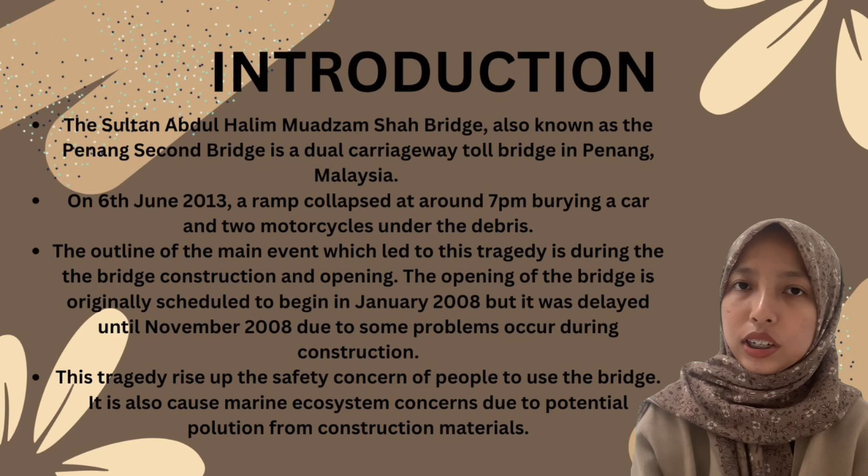Next, let's look at the types of corrosion that we can relate to our case study. The first one is uniform corrosion. Uniform corrosion happens when the material is continuously exposed to a corrosive environment and then takes place uniformly across the surface. It is significant in this case because long-term exposure to the marine environment can lead to uniform corrosion on the bridge structure, and it might contribute to overall material degradation.

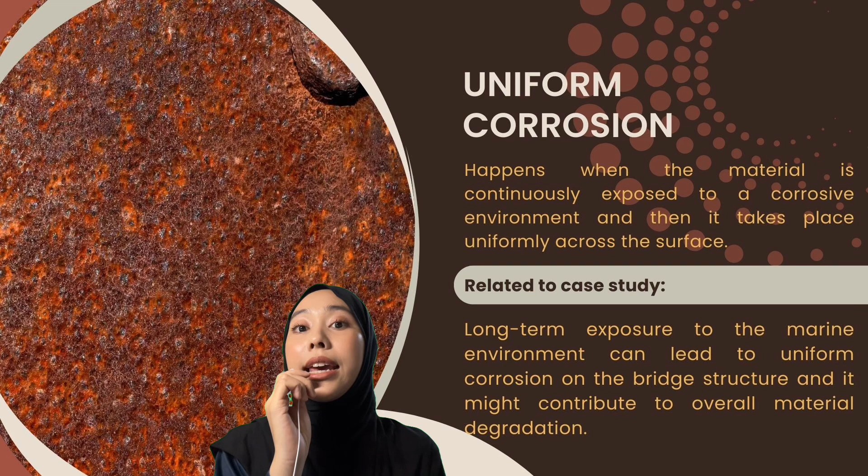The next one is pitting corrosion. Pitting corrosion is a type of corrosion that occurs locally and leaves the metal with tiny holes or pits. It begins when a protective layer is broken, allowing chloride ions in the salt water to concentrate in places and start a localized attack. Since the bridge is in a maritime setting, chloride ions have the potential to erode the steel cable's protective coatings. When stress concentrates, pits will start to crack and spread under tension. Over time, structural components are severely weakened by this kind of corrosion.

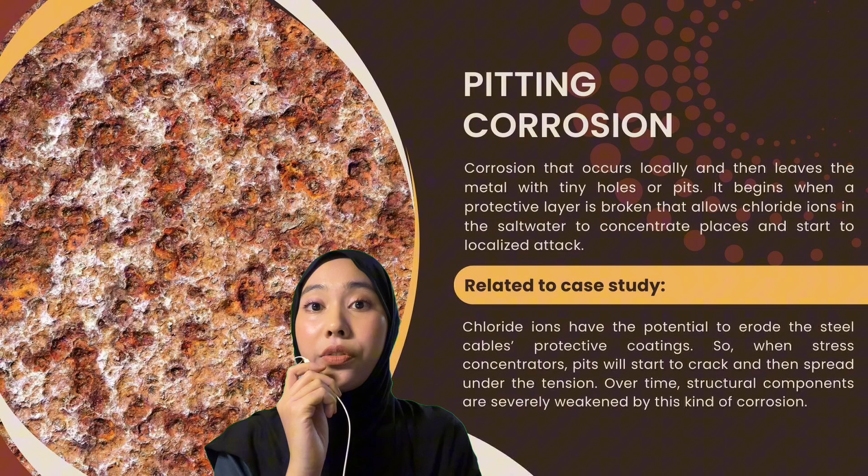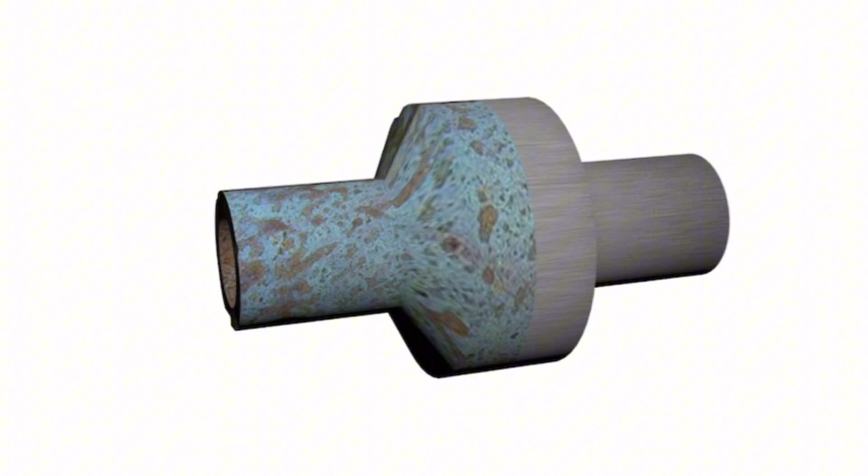The next one is galvanic corrosion. Galvanic corrosion happens when two different metals are electrically coupled in conductive environments. While the cathodic metal is shielded, the more anodic metal will corrode quickly. Galvanic corrosion can happen in this case if the cable joins two other metals with dissimilar electrochemical potential without adequate separation. So it is unlikely to be the main reason unless the bridge design included an unsuitable material pairing.

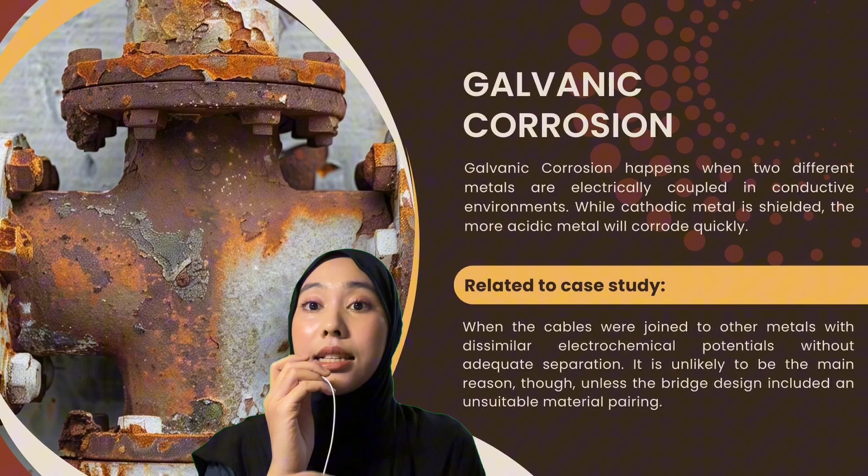After that, crevice corrosion can happen in small spaces or cracks where oxygen is limited and an acidic environment is produced. It usually happens in places where water is standing still or on bolted joints. Corrosion may worsen in this case if water and chloride ions are trapped in cracks in cable assemblies, clamps, or junctions, and this could lead to stress failures by weakening the anchorages or cable terminations.

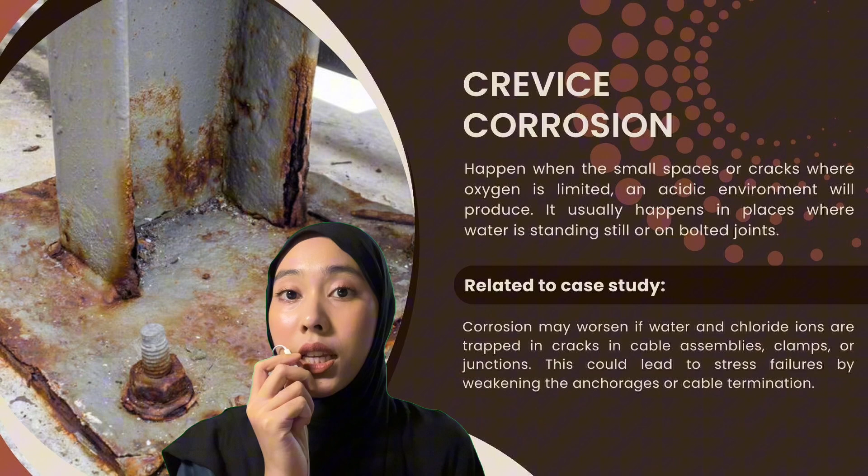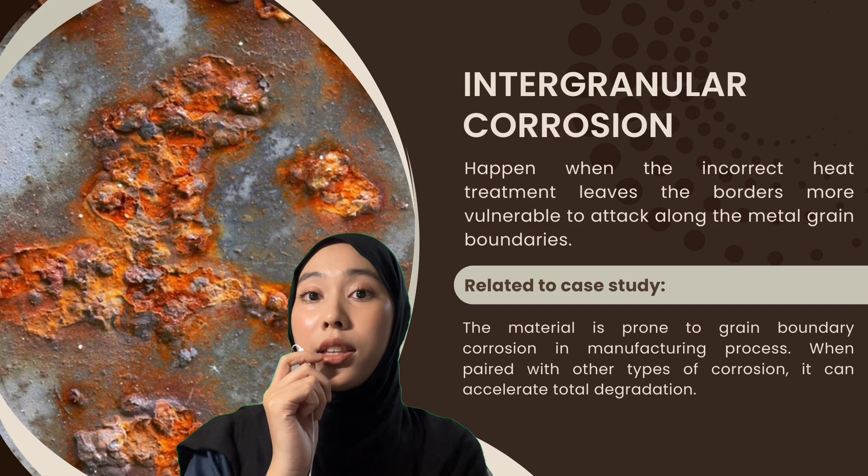The last one is intergranular corrosion. Intergranular corrosion happens when incorrect heat treatment leaves the borders more vulnerable to attack along the metal grain boundaries. It is related to this study if the material is prone to grain boundary corrosion in the manufacturing process. When paired with other types of corrosion, it can accelerate total degradation.

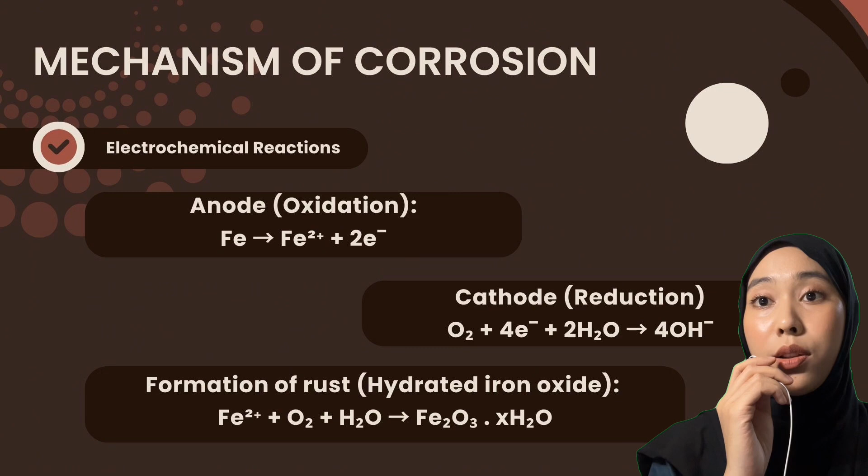We move to the mechanism of corrosion, which is an electrochemical reaction. At the anode, oxidation happens when the iron in the steel oxidizes and forms ferrous ions, while at the cathode, reduction happens when oxygen dissolved in water is reduced to hydroxide ions. This is how the formation of rust happens, where the ferrous ions react with hydroxide ions and oxygen to form rust. In this case, the cables made from steel are exposed to such electrochemical reactions in the seawater, and the chloride ions from the seawater accelerate the anodic reaction, which speeds up the corrosion process.

Let's move forward to environmental factors. The first one we have here is humidity and salt exposure. Since the bridge is in a high humidity coastal area, it encourages condensation on the metal surface.

The chloride ions that act as a catalyst will dissolve the protective coatings and enhance the conductivity to speed up the electrochemical corrosion process. We move to the next one, which is temperature variations.

Temperature fluctuation can lead to thermal stress that worsens coating deterioration and cracks, so it's possible for corrosive substances to enter the steel.

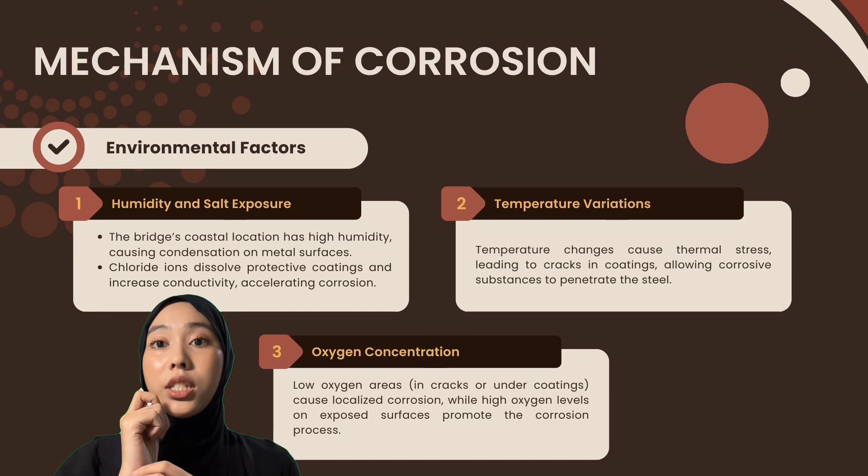And the last one is oxygen concentration. When the low oxygen regions found in cracks or under the coatings produce differential aeration, it causes localized corrosion and high oxygen availability on exposed surfaces, encouraging the cathodic process.

Let's move to the next point, which is material properties. There are two components: steel cable and protective coatings. The material used for the steel cable is high strength steel, with high tensile strength, so it is prone to stress corrosion cracking, pitting corrosion, and brittleness under stress.

Another component is protective coatings. The materials used are galvanization, grease layer, and HDPE sheath. The properties for galvanization are durable and resistant to corrosion, but over time the sacrificial corrosion eventually deteriorates.

The properties for the grease layer are self-healing and water barrier, avoiding the ingression of oxygen and moisture. The last one is the HDPE sheath, which is resistant to UV and chloride ions and also provides mechanical and chemical protection. However, over time it can still crack.

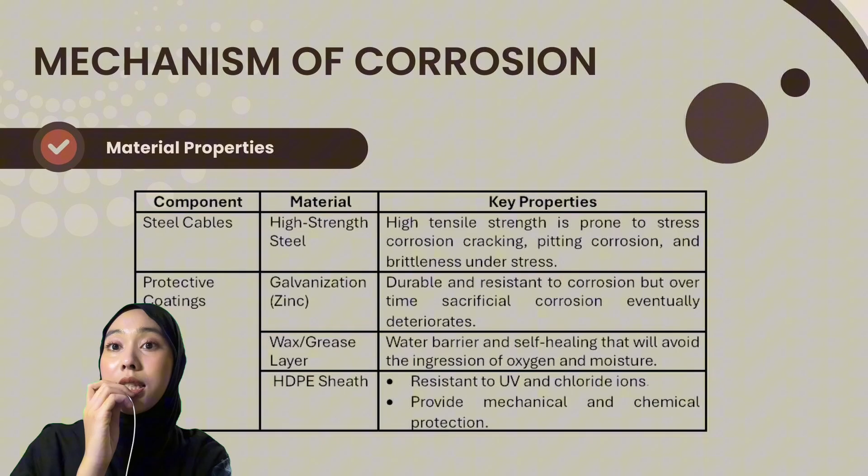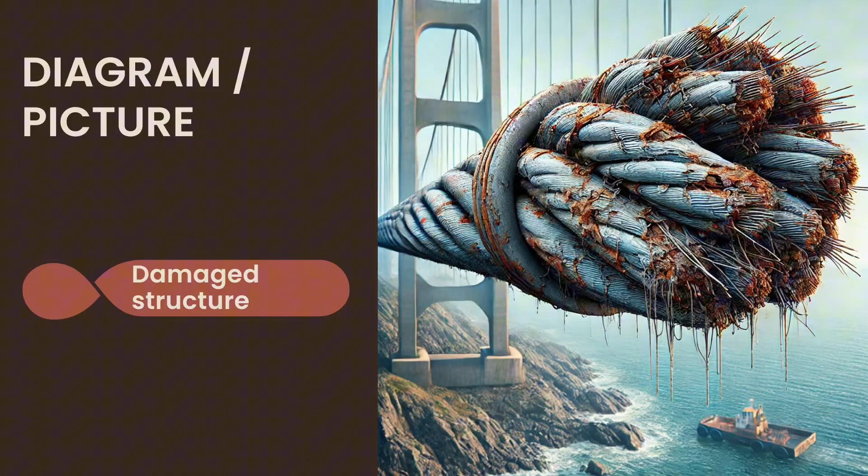Now let's see the diagram of the corrosion mechanism, illustrating the corrosion process in high-strength steel cables used in bridge construction. These are relevant images showing the general damage to structures affected by corrosion, since this is a specific historic record and there are no actual photographs provided. The flowcharts here show the progression of the incident.

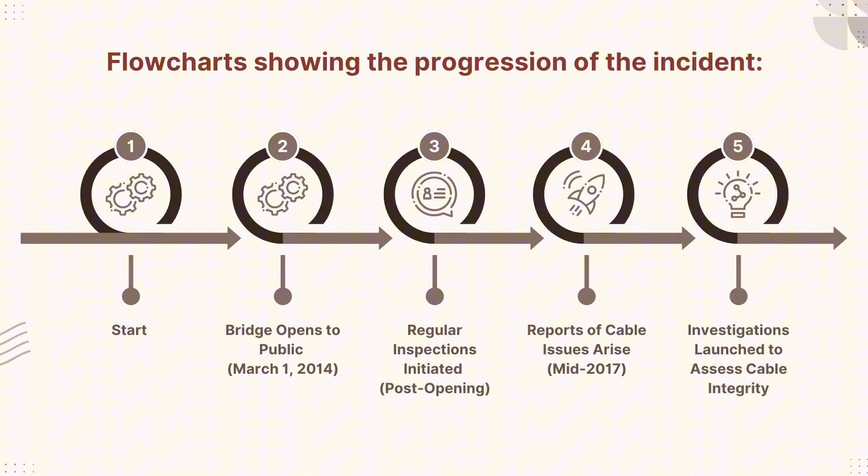It started when the Sultan Abdul Halim Muadzam Shah Bridge officially opened on 1 March 2014 after overcoming various construction challenges. Following its opening, regular inspections were mandated to ensure structural integrity. In mid-2017, concerns regarding the cables began to surface, prompting further investigation. Authorities initiated an investigation to assess the integrity and safety of the cable system, which revealed vulnerabilities raising alarms about potential risks.

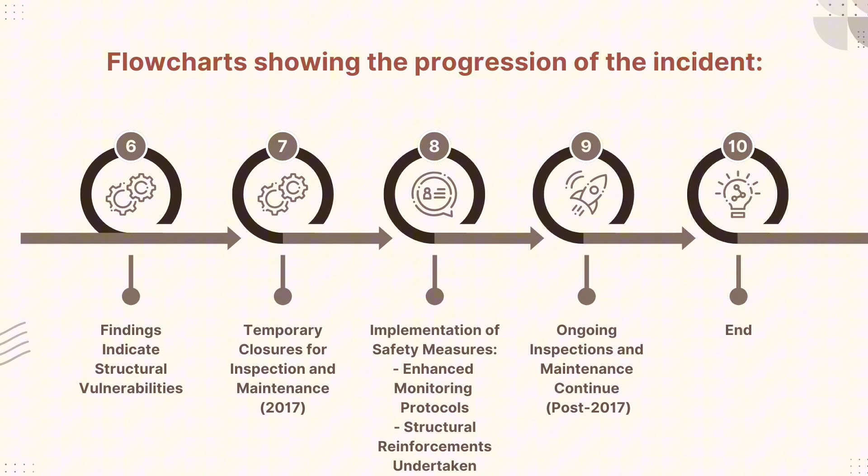To address these concerns, sections of the bridge were temporarily closed for thorough inspection and maintenance work. To enhance monitoring protocols and structural reinforcement, ongoing safety measures were implemented. Since the incident, regular inspections have remained a priority to monitor the bridge's condition. And this is the flow of the incident.

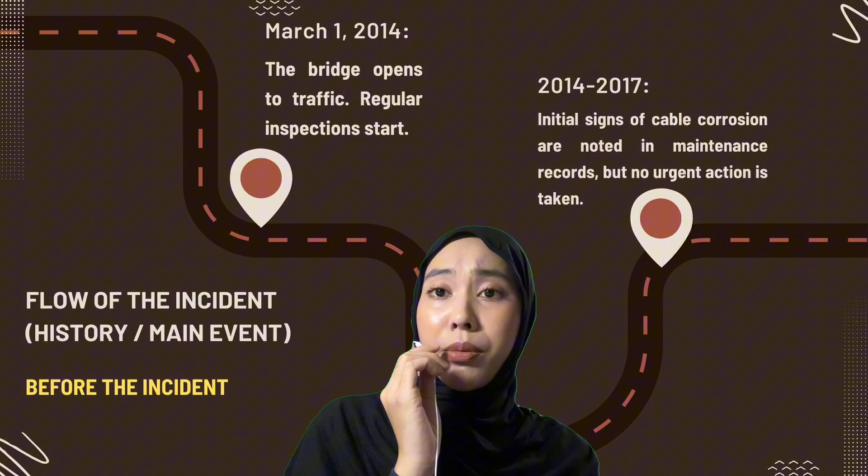On 1 March 2014, after overcoming several construction delays, the Sultan Abdul Halim Muadzam Shah Bridge officially opened and routine inspections started to monitor the bridge's structure. Around 2014 to 2017, initial signs of corrosion were found during routine inspections, but no immediate action was taken. Certain issues were mentioned in the records but still not considered serious.

On July 2017, according to official inspection, several cables had serious corrosion that forced authorities to have urgent discussions about safety precautions.

On August 2017, additional inspection verified that the corrosion was more widespread than first thought, and some sections of the bridge were then temporarily closed for intensive maintenance and inspections.

In September 2017, necessary repairs and safety inspections were conducted and the bridge was partially closed to traffic. Therefore, concerns about bridge safety rose among the public.

On November 2017, following the completion of required repairs and strengthening of the cable system, the bridge was fully opened to traffic again. Protocols for routine monitoring have been put in place to avoid it happening again in the future.

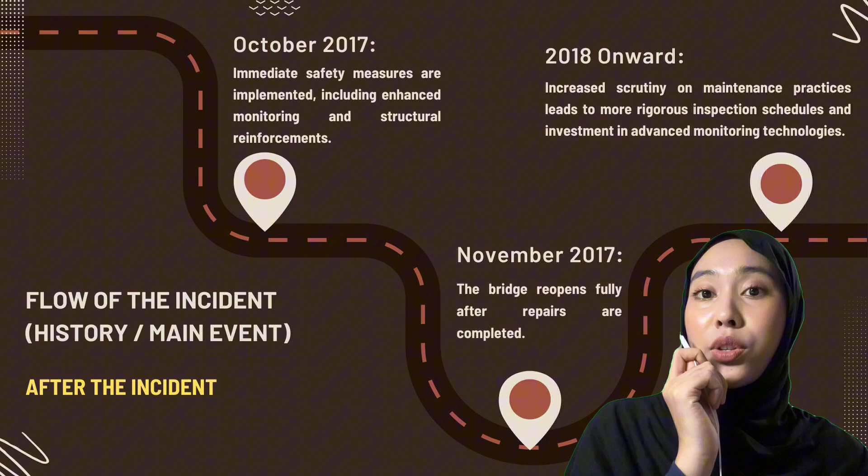For 2018 and onward, the scrutiny of maintenance procedures has been increased for significant infrastructure projects in Malaysia, and this is one of the long-term effects. Authorities invest in cutting-edge monitoring technologies and commit to more stringent inspection schedules to guarantee structural integrity.

Other factors that can be pointed out are environmental conditions like weather and pollution. Weather such as high winds, heavy rainfall, and extreme temperatures have stressed the cables over time. Airborne pollutants such as industrial emissions may have caused chemical degradation of materials.

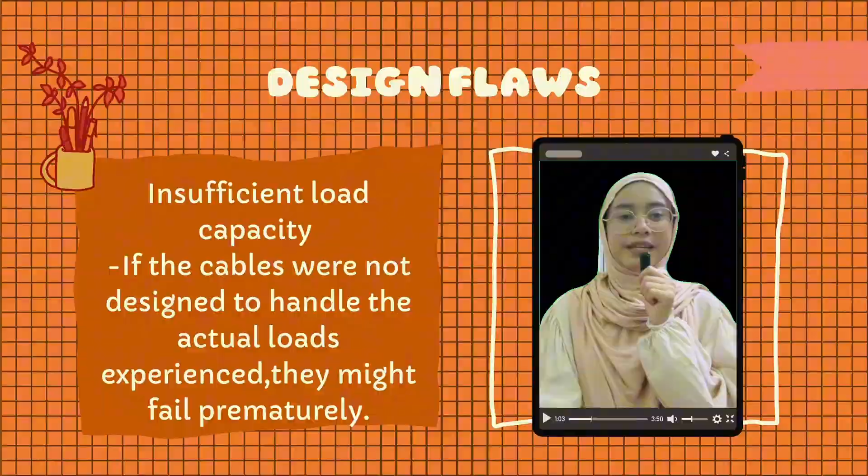Next is design flaws. If the cables were not designed to handle the actual loads experienced, they might fail prematurely. Another factor is material selection issues. If the materials did not meet the required specifications, they could have degraded more quickly, and materials with low fatigue performance could have weakened under repeated loading cycles.

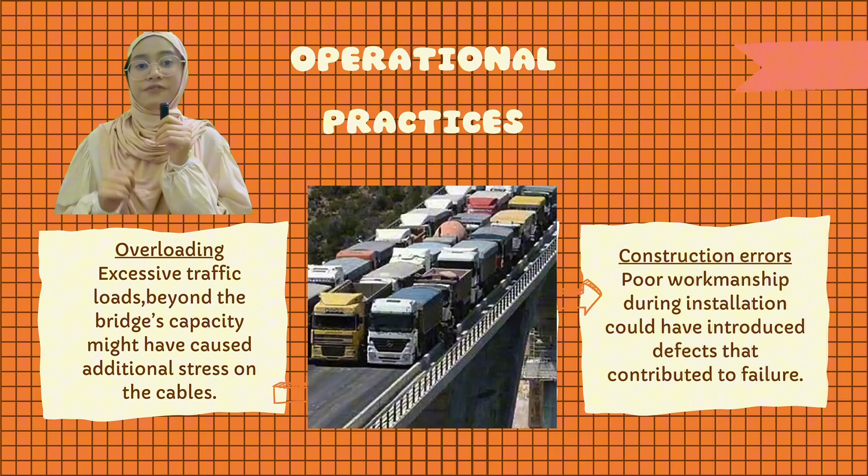And the last factor is operational practices. Excessive traffic loads beyond the bridge's capacity might have caused additional stress on the cables. Poor workmanship during installation could also have introduced defects that contributed to failure.

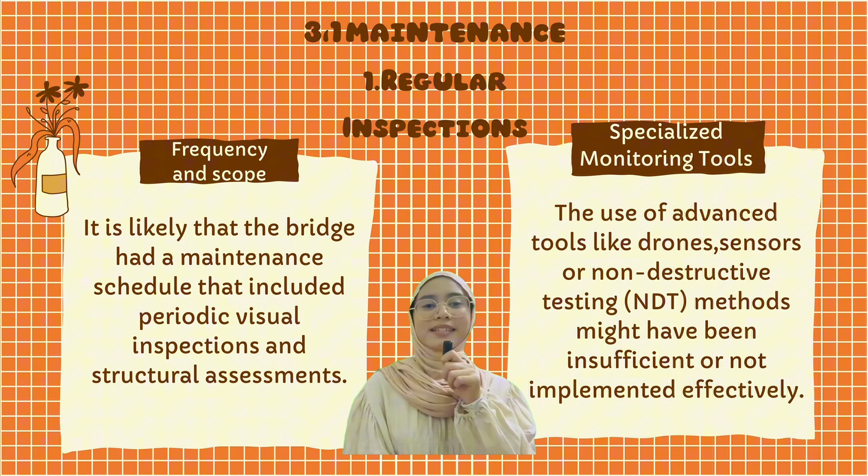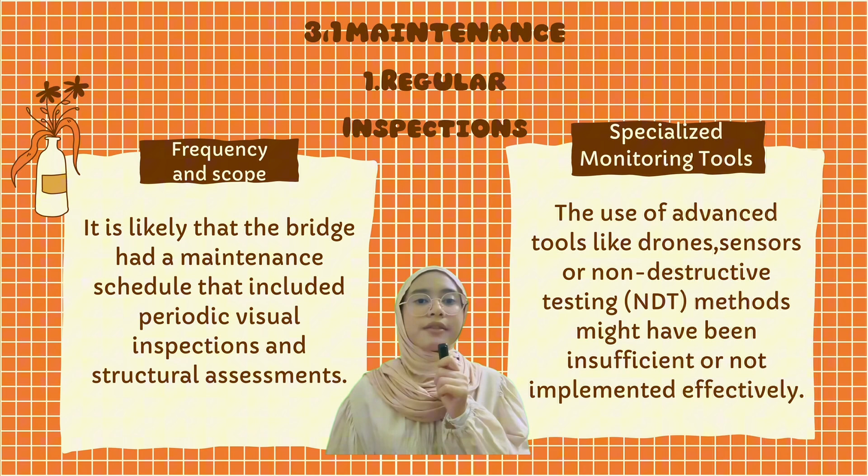It is likely that the bridge had a maintenance schedule that included periodic visual inspections and structural assessments. However, the adequacy of these inspections in detecting early signs of cable wear or failure could be questioned. For specialized monitoring tools, the use of advanced tools like drones, sensors, or non-destructive testing methods might have been insufficient

or not implemented effectively. Corrosion protection measures: the cables were likely treated with anti-corrosion coatings, but the effectiveness of these measures in the marine environment could have diminished over time. Maintenance records also may reveal gaps in regular upkeep, incomplete inspections, or delays in addressing identified issues.

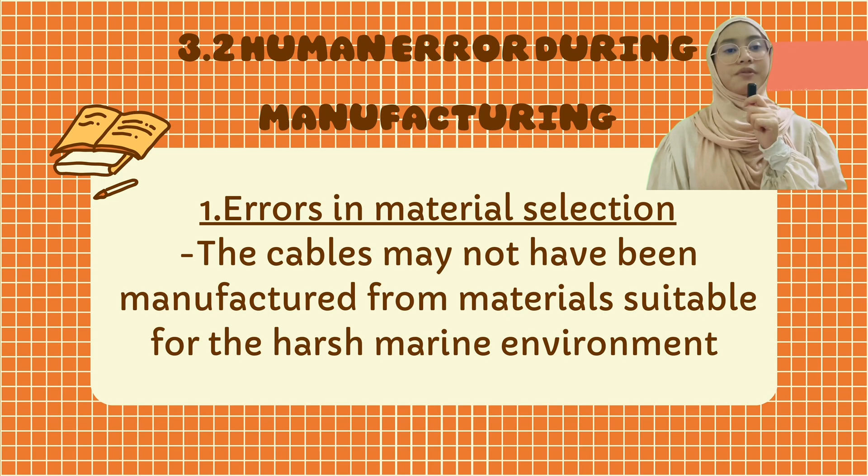Human error during manufacturing includes errors in material selection. The cables may not have been manufactured from materials suitable for the harsh marine environment. For example, using a steel alloy with an inadequate corrosion resistance or fatigue strength could have been a critical error.

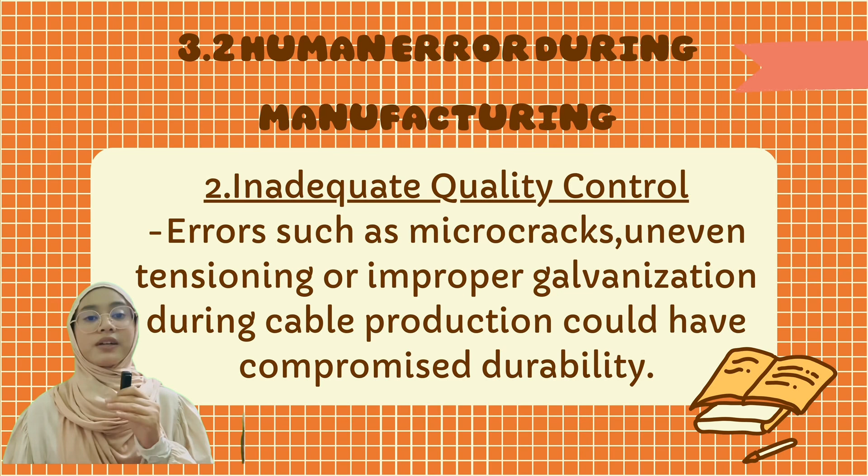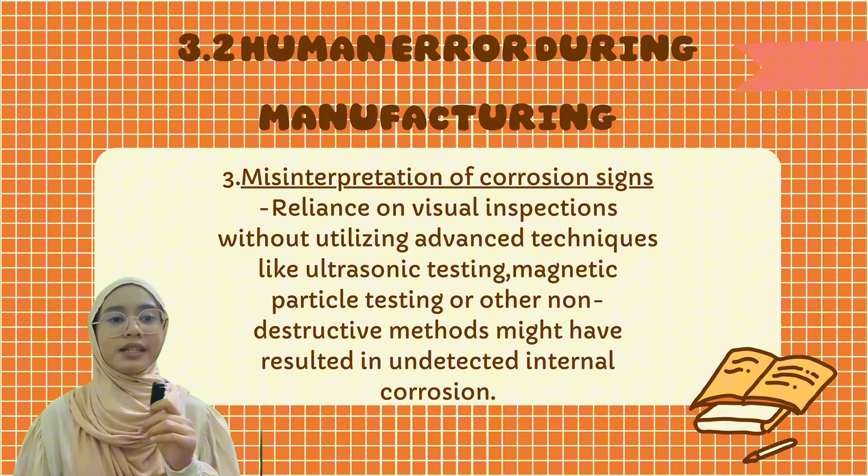For inadequate quality control, errors such as micro cracks, uneven tensioning, or improper galvanization during cable production could have compromised durability. Misinterpretation of corrosion signs might have occurred if staff lacked the technical expertise to identify or interpret corrosion-related vulnerabilities. Reliance on visual inspections without utilizing advanced techniques like ultrasonic testing, magnetic particle testing, or other non-destructive methods might have resulted in undetected internal corrosion.

Next, there are some suggestions that we can do for preventing similar incidents from occurring in the future, which are first improving the materials, better design practices, enhancing maintenance protocol, and using advanced monitoring technology.

Firstly, in terms of improving materials use, they should use higher grade corrosion resistant materials such as carbon fiber reinforced polymer, stainless steel or advanced alloys to increase the durability and load bearing capacity of the cables. They should incorporate protective coatings to prevent wear, corrosion and environmental degradation, and then conduct extensive material testing to ensure performance under various environmental conditions such as extreme temperatures, humidity and salt exposure.

For the next point, which is better design practices, try to optimize cable design using advanced computational modeling to simulate real-world stress and load conditions, which should incorporate redundancy in the structural design to reduce the risk of total failure if a single component is compromised. Design for easy inspection and replacement of critical components, minimizing downtime during maintenance.

After that, for the purpose of enhancing maintenance protocols, they should implement a rigorous maintenance schedule, including regular visual inspections, non-destructive testing, and load testing. Establish clear guidelines for identifying early signs of wear, fatigue, or structural weakness, and ensure proper documentation of maintenance activities to track the performance history of the cables.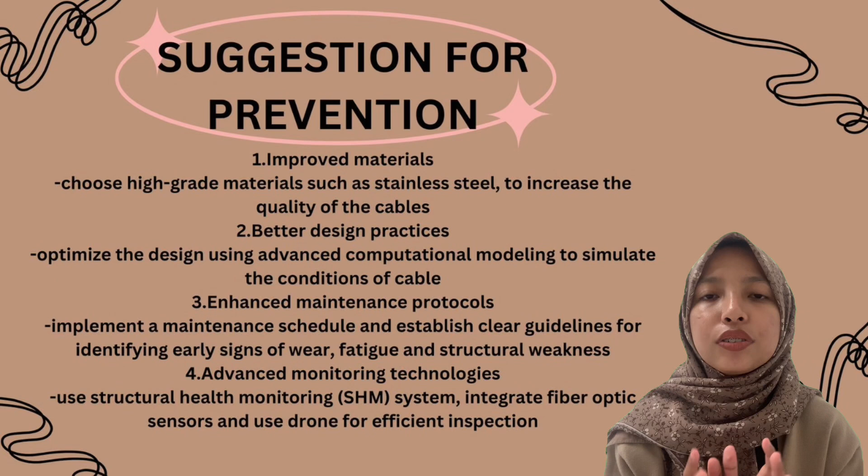Lastly, in terms of advanced monitoring technology, they should deploy real-time structural health monitoring (SHM) systems that use sensors to detect strain, vibration, and temperature changes in the cable. Integrate fiber optic sensors to monitor stress distribution and detect potential anomalies before failure occurs. Use drones and AI-driven imaging tools for efficient inspection of hard-to-reach areas.

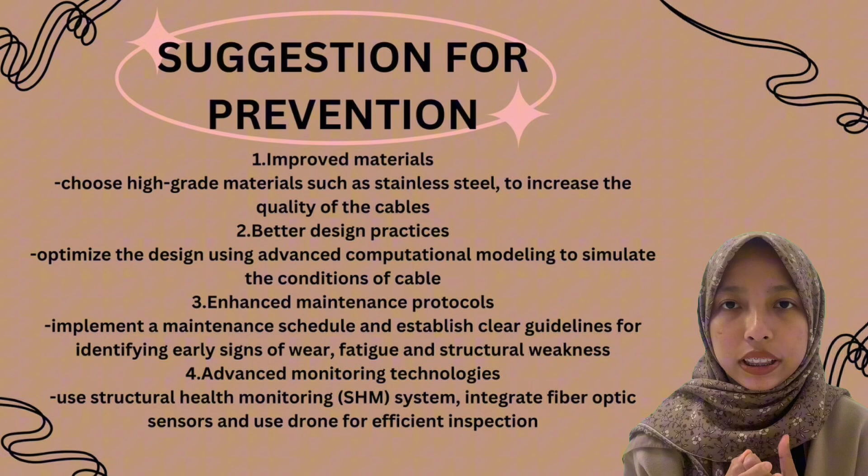By integrating these recommendations, future incidents can be significantly reduced, ensuring the longevity and safety of critical infrastructure like the Sultan Abdul Halim Muadzam Shah Bridge.

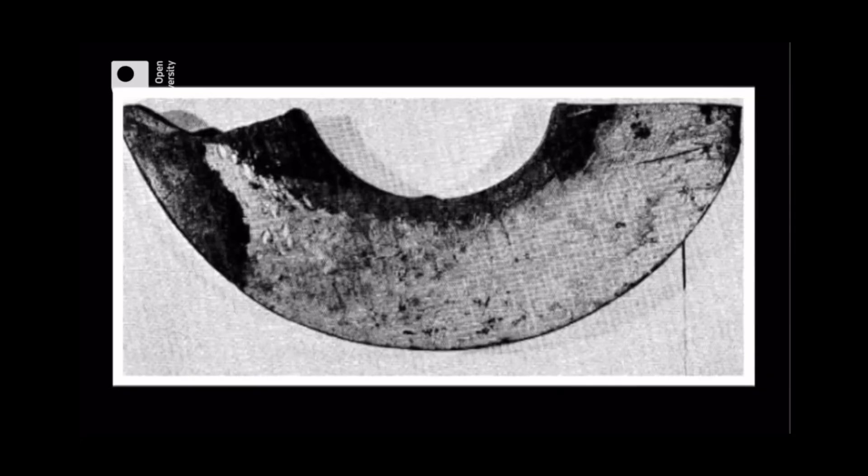The second case is the Sunshine Skyway Bridge failure, located at Tampa Bay, USA, in May 1980. The factors here are ship collision, poor cable protection, and inadequate impact resistance.

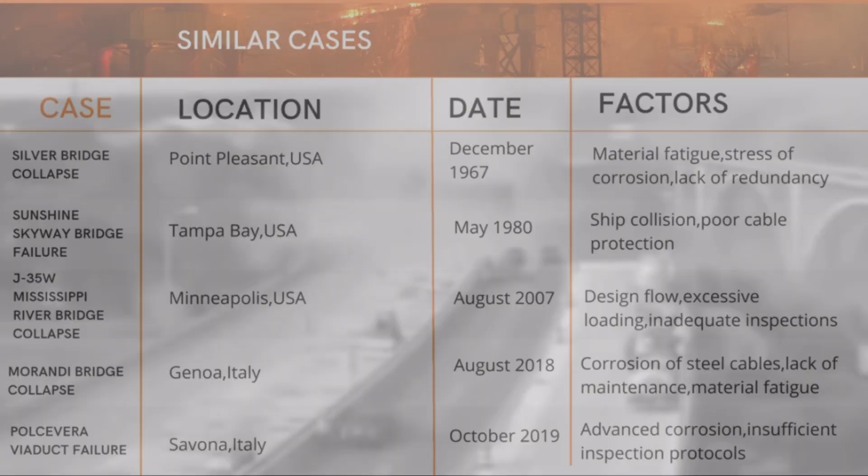The third case is the I-35W Mississippi River Bridge collapse, in Minneapolis, USA, in August 2007, where the factors are design flaw, excessive loading, and inadequate inspections.

The fourth case is the Morandi Bridge collapse in Genoa, Italy, from August 2018. The factors are corrosion of steel cables, lack of maintenance, and material fatigue.

The fifth case, which is the same as our chosen case, is the Polcevera Viaduct failure in Savona, Italy, from October 2019, where the factors are advanced corrosion, insufficient inspection protocols, and environmental factors. Common factors in cable failures have been analyzed, the first being environmental conditions.

Most cases involve structures exposed to harsh environments, including marine settings, where saltwater accelerates corrosion. The next factor is design and material flaws. Using suboptimal materials or flawed designs, like in the case of the Silver Bridge, with insufficient redundancy, can lead to catastrophic failures. Delays in addressing visible deterioration like rust and cracks or inadequate inspection techniques are common contributors.

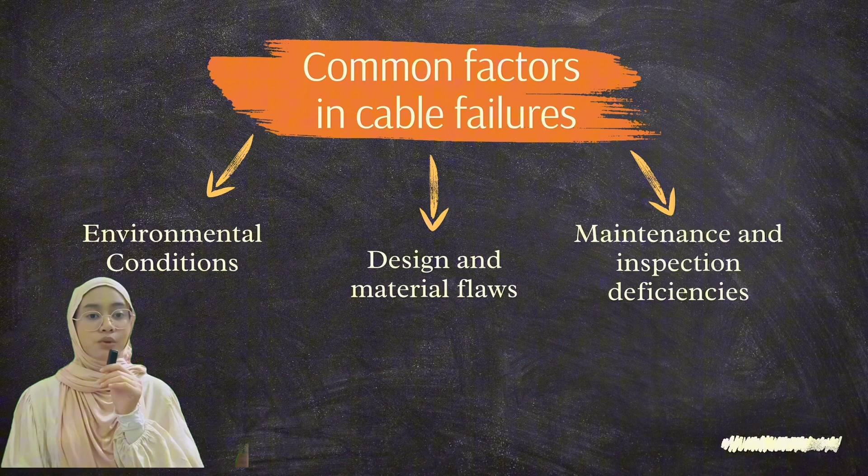For operational overloading, many failures involve excessive or unexpected loads that exceeded the structure's capacity, as in the I-35W bridge collapse. Also, human error, mistakes during construction, manufacturing, or inspection phases played a significant role in several cases.

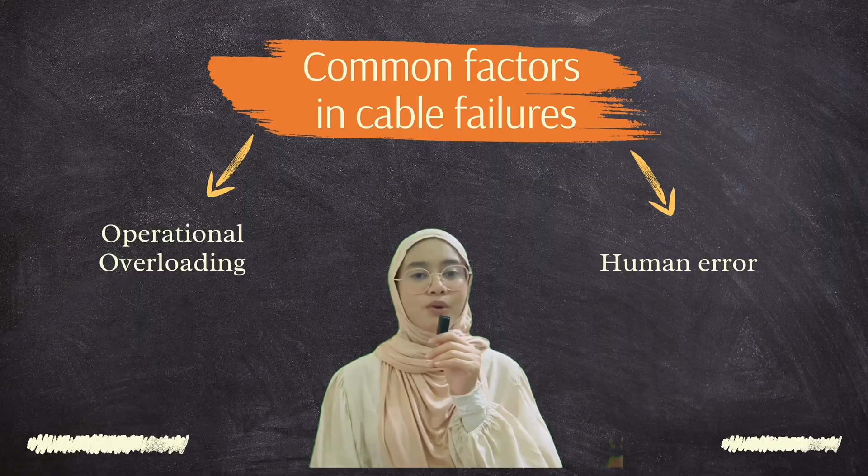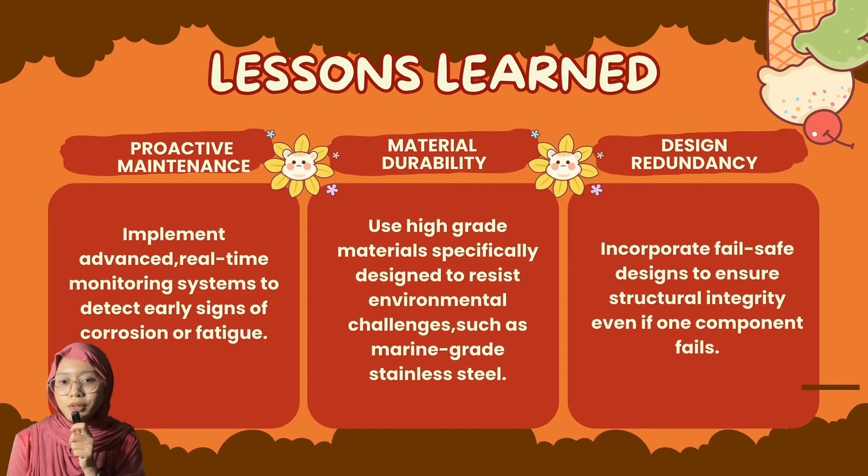Lessons that can be learned from these cases are: implement advanced real-time monitoring systems to detect early signs of corrosion or fatigue; use high-grade materials specifically designed to resist environmental challenges, such as marine-grade stainless steel; and incorporate fail-safe designs to ensure structural integrity even if one component fails.